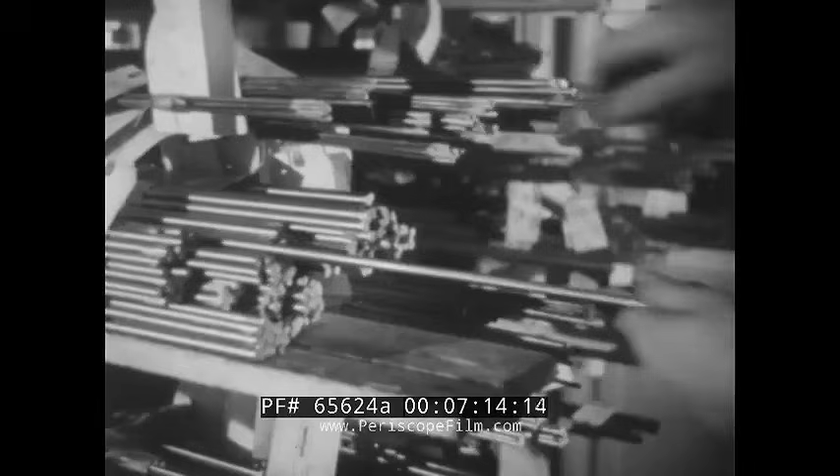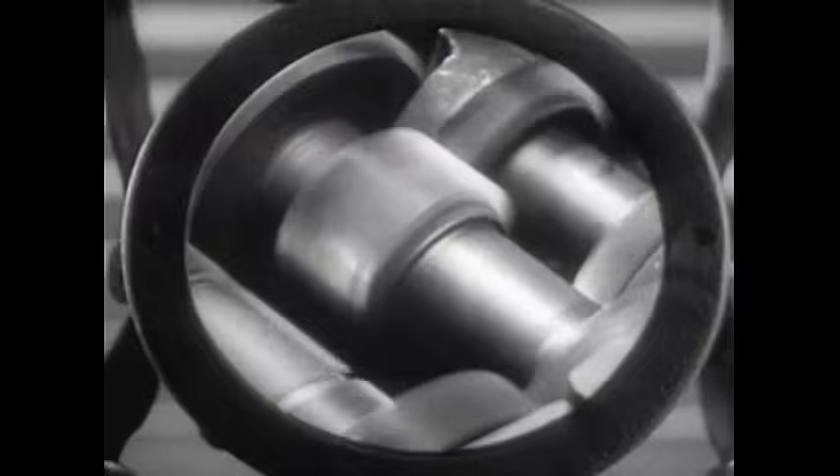They are not being careless, and they are not being slow. They are doing something extraordinarily difficult that almost nobody in the United States knows how to do properly, and they are doing it badly, because the knowledge of how to do it well is 4,000 miles away in a small city in Bavaria, and its owners are not sharing.

32 years later, in the same city, in a factory covering 600,000 square feet in the middle of downtown New Britain, 7,000 people are producing ball bearings at a rate of 100 every minute. 100 a minute is 6,000 an hour, is 144,000 in a day of continuous running. Set that against the 7 men and their 150, and you are looking at roughly a 1,000-fold increase in a single lifetime, in the same town, under the same company name.

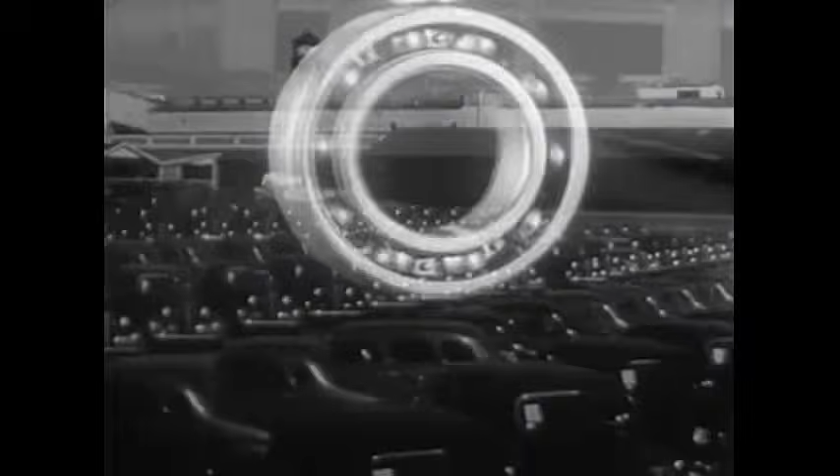That company was the Fafnir Bearing Company, and it was founded on a proposition that in 1911 sounded close to absurd, that an American factory could make a ball bearing as good as a German one, because in 1911 it could not. America built more automobiles than anyone on earth, and could not make the bearings that went inside them.

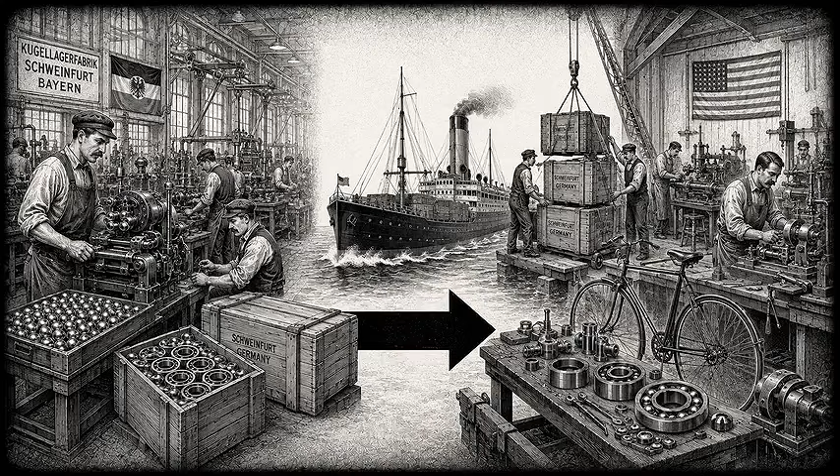The bearings, or the components to assemble them, came in on ships from England and above all from Germany, where they were expensive and hard to obtain and unquestionably the best in the world. This is the story of the object that America could not make, of why it was so much harder than it looks, and of how a hardware town in Connecticut learned the trick.

To understand the dependency, you have to understand how completely the ball bearing had become the connective tissue of industrial civilization by the early 20th century. Anything that rotates has a bearing at each end. The bicycle boom of the 1890s ran on ball bearings.

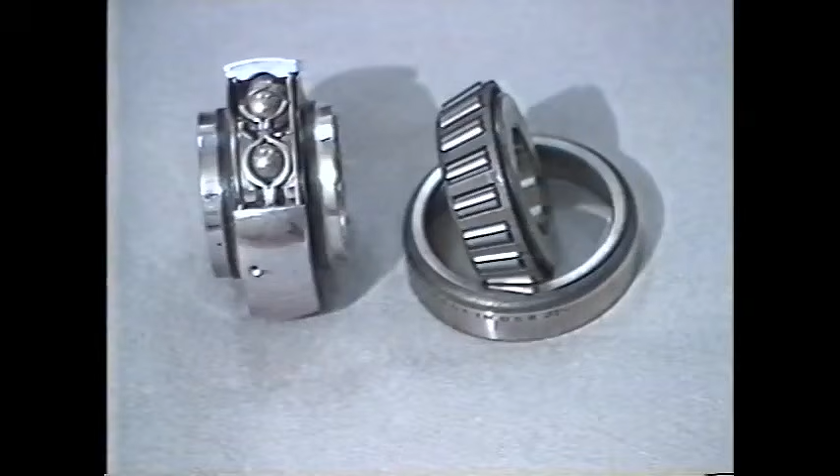The automobile, arriving in earnest in the first decade of the new century, consumed them by the dozen per vehicle. Electric motors, machine tool spindles, generators, pumps, fans, transmissions, every rotating shaft in every machine in the world sat in bearings, and the best of those bearings were rolling element bearings, and the best rolling element bearings came out of Germany. The American position was genuinely uncomfortable.

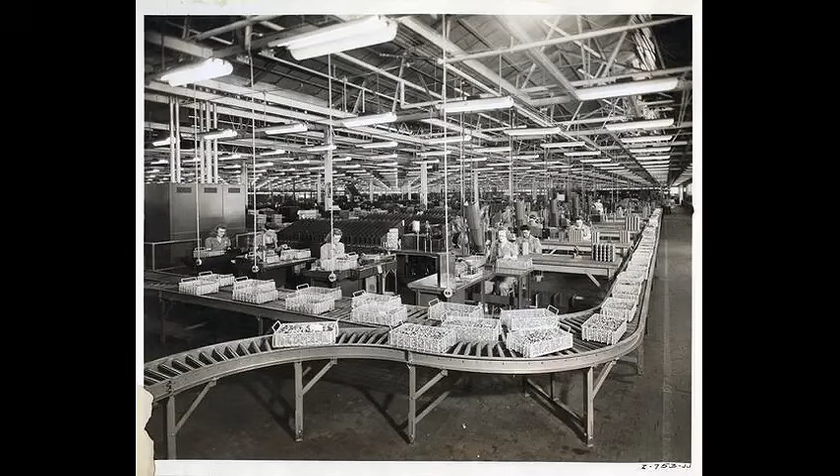This was not a nation short of engineering talent or manufacturing capacity. This was the country that had invented interchangeable manufacture, that was in the process of inventing the moving assembly line, that would shortly be producing automobiles at a rate the rest of the world could not comprehend.

And it was importing the little steel spheres that made those automobiles' wheels turn, or importing the components and assembling them domestically, because the process knowledge required to make a precision ball bearing to German standard did not exist in the United States and could not be bought.

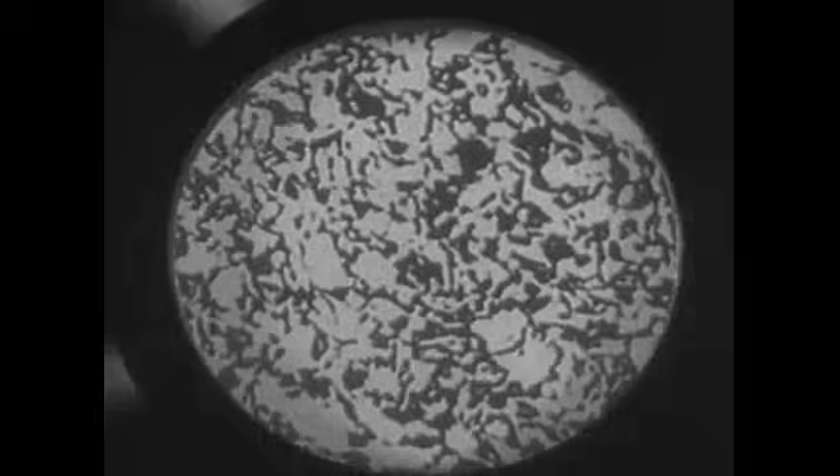That last point is the crucial one. Patents can be licensed, machines can be purchased. But what Germany possessed was not principally a patent or a machine, it was 3 decades of accumulated, hard-won, hands-on process knowledge about a manufacturing problem that is far, far harder than it appears from the outside.

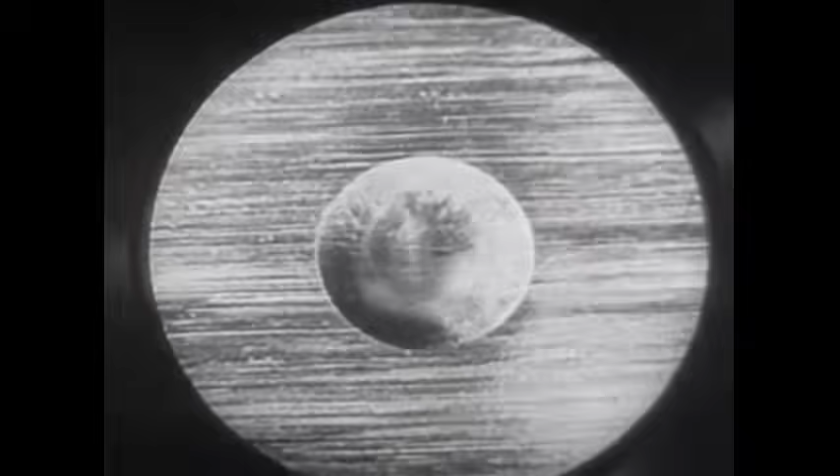Complexity of design and difficulty of production are 2 entirely different axes, and they frequently point in opposite directions. A complicated machine is hard to design and, once designed, often straightforward to make, because it is assembled from many parts, each of which is individually undemanding.

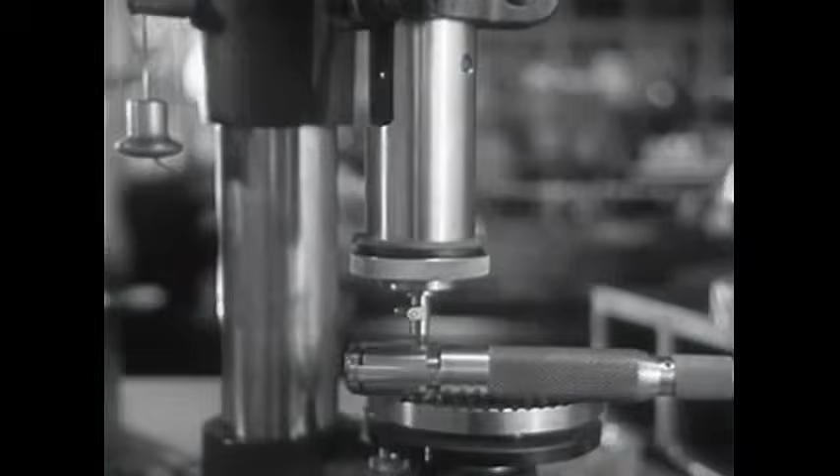A ball bearing is trivial to design and savagely hard to make, because its entire function depends on a handful of dimensions being correct to a degree of precision that ordinary manufacturing simply cannot reach, and because one of those requirements is the production, in millions, of an object that is genuinely, mathematically perfect. The resolution of the paradox is that Germany's advantage was never intellectual, it was procedural.

Germany had figured out how to make a perfect sphere, cheaply, by the million, and America had not. No amount of American cleverness about engines or assembly lines substituted for that one specific piece of shop floor know-how.

To see why it was so hard, you have to look at what a ball bearing actually does, and then at what that demands of the balls inside it.

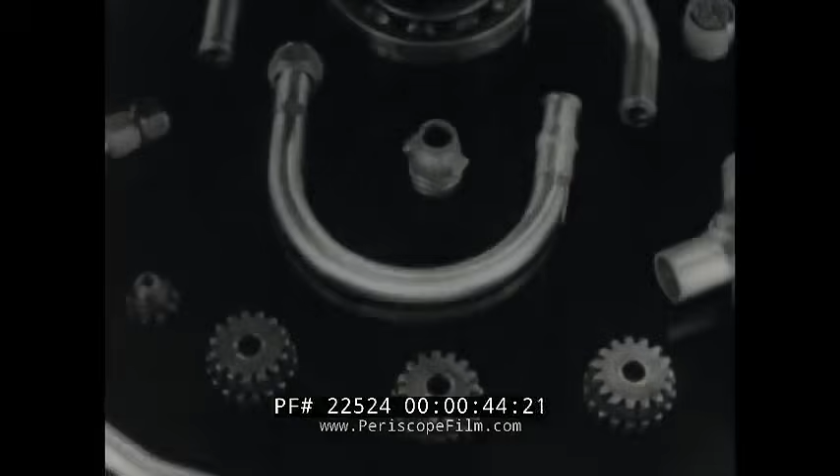The popular history of American industrial power tends to start with the assembly line and run forward, as though American manufacturing supremacy were a natural condition that simply switched on around 1913. It skips the long, unglamorous apprenticeship, the decades in which American industry was in some areas a follower, buying its precision from Europe and, slowly, expensively, learning to make it at home.

It also, when it does mention ball bearings, almost always jumps straight to the Second World War and the bombing of Schweinfurt, the famous and famously costly attempt to strangle German war production by destroying its bearing plants. That story is worth telling, and this channel has told it.

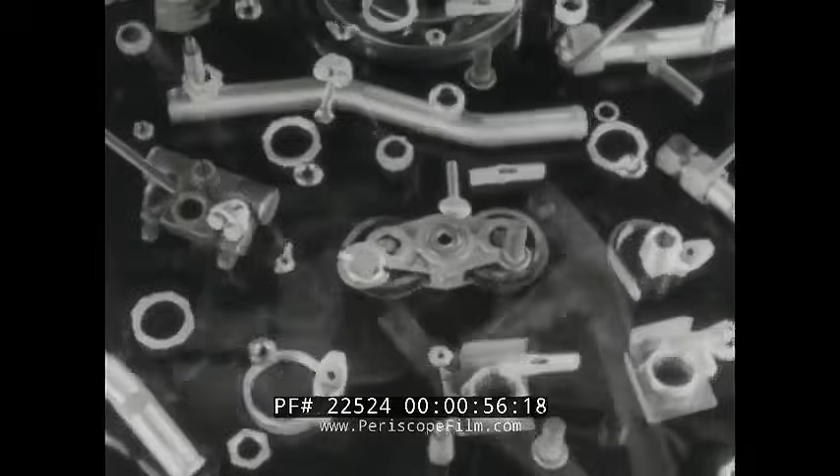But it is the last chapter, and telling only the last chapter makes it look as though bearings mattered because bombers attacked them. They mattered long before, and the reason Schweinfurt was a target at all in 1943 traces back to a decision a Bavarian metalworker made in the 1880s that gave one small city a grip on a global industry.

And the popular history entirely omits the mechanical heart of the matter, which is the genuinely beautiful question of how you make a perfect sphere. Not a nearly round lump, a sphere, round to within a fraction of a thousandth of an inch, identical to its neighbors, produced not one at a time by a craftsman, but in industrial millions. That is the actual problem.

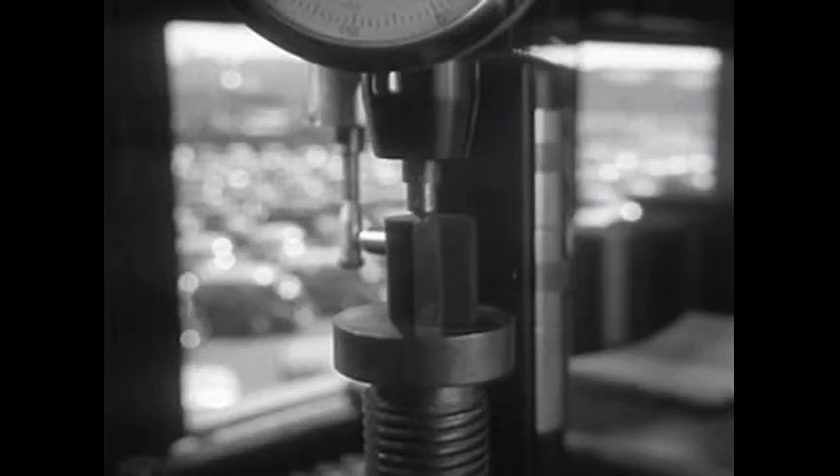Everything else in the story of the ball bearing, the German dominance, the American dependency, the Connecticut factory that broke it, is downstream of that single manufacturing question. So let us answer it properly, starting with why sphericity matters so much in the first place.

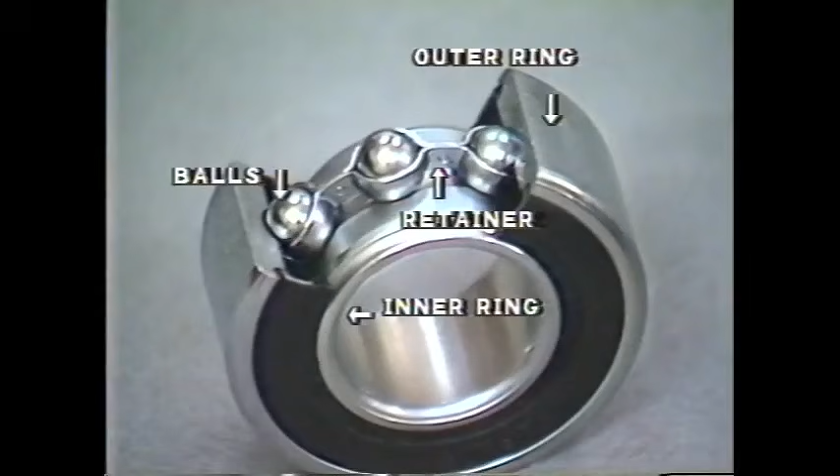Put a shaft in a plain hole and turn it, and the two surfaces slide against one another. Sliding friction is high, it generates heat, and without a well-designed film of lubricant between them, the surfaces will gall and seize. The ball bearing eliminates the sliding entirely by inserting rolling elements between the shaft and its housing, and rolling friction is a small fraction of sliding friction.

That is the entire proposition. Replace sliding with rolling, and the shaft spins nearly free.

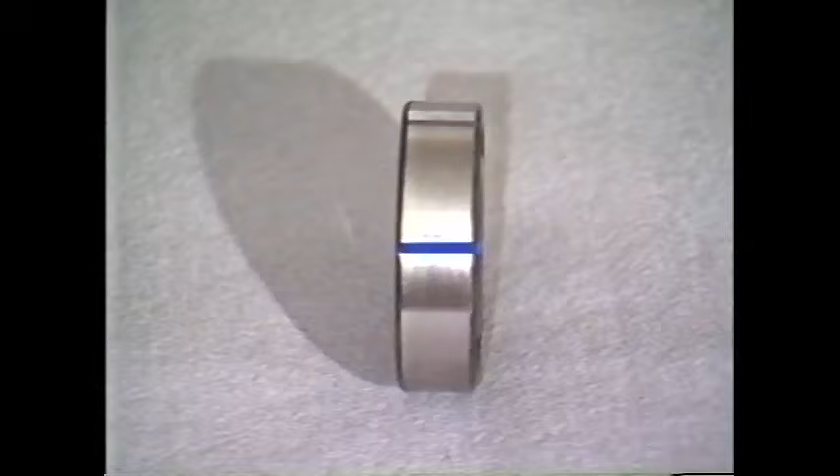But look closely at how the load actually travels through the bearing, because this is where the precision requirement comes from. The shaft's weight and working load pass into the inner ring, then into the balls, then into the outer ring, then into the housing.

And the contact between a ball and a raceway is, in the pure geometric sense, a single point. Under load, the steel deforms elastically, and that point spreads into a tiny ellipse, but it remains extraordinarily small, and the entire load passes through it.

The pressures at that contact are enormous, far beyond what the steel could bear over any larger area, sustained only because the contact is momentary and rolling, and the steel is exceptionally hard.

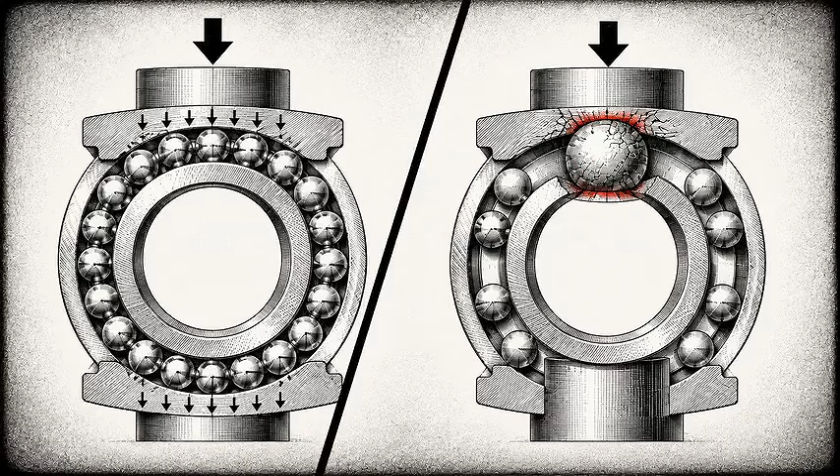Now consider what happens if the balls are not all the same size. Suppose one ball in a set is 1/10,000th of an inch larger than the others. That ball, being fractionally taller, does not share the load. It carries it, all of it, or nearly.

Every other ball is riding free, and the one oversized ball is taking the whole load through its single tiny contact patch at a pressure it was never designed to survive. It will fatigue, spall, and disintegrate, and its fragments will destroy everything else in the bearing.

That is why the ball bearing is a precision object rather than a simple one. It does not merely need round balls, it needs balls that are round and identical to tolerances that a 19th century workshop could not measure, let alone produce.

Stop and consider the sphere as a manufacturing problem because it is unlike anything else in a machine shop. Almost every other shape is made by controlling a tool's position relative to the work. You turn a cylinder by holding a cutter at a fixed distance from a rotating axis. You mill a flat by running a cutter along a straight path. You drill a hole by guiding a drill along a line. In every case, accuracy comes from accurately positioning the tool.

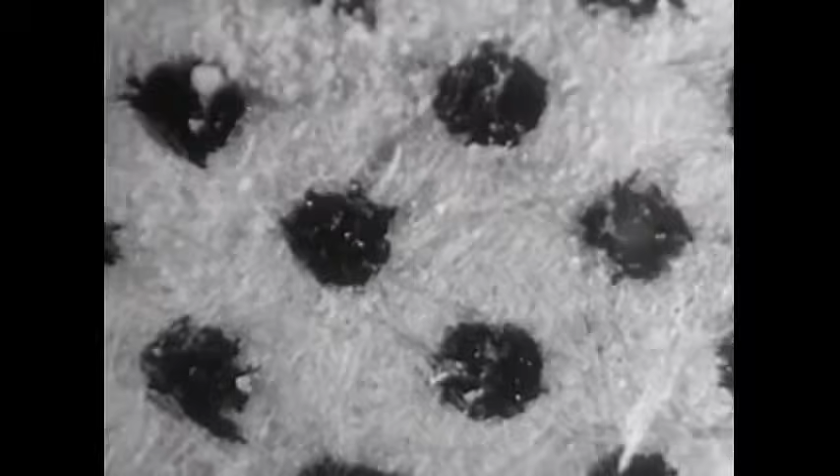A sphere defeats this. A sphere has no axis, no flat, no edge, no feature to reference from. Every point on its surface is identical to every other. There is no orientation in which you can clamp it that distinguishes one part from another, and if you were to hold it and machine one region, you would need to release it, reorient it perfectly, and machine the next region, blending seamlessly, and you would have to do this over the entire surface without ever creating a facet, a step, or a flat spot.

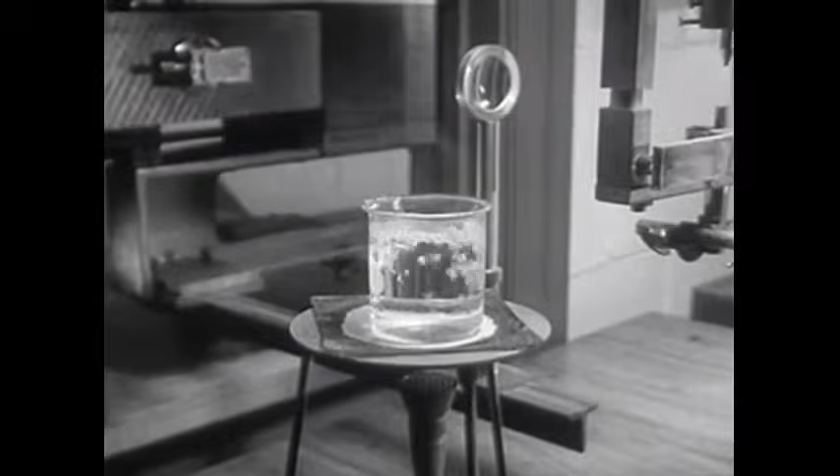Doing that once by hand with enormous skill is possible. Doing it a million times identically is not. Before Germany solved it, this is exactly how balls were made. They were produced by hand on turning machines, largely in England, and the results were what you would expect: imprecise, prone to breakage in service, and expensive. Every bearing was limited by its worst ball, and there were always worst balls.

The bicycle makers and early machine builders lived with it because there was no alternative. The breakthrough, when it came, did not consist of finding a cleverer way to aim a tool at a sphere. It consisted of abandoning the idea of aiming altogether, and it came out of a bicycle workshop in Bavaria.

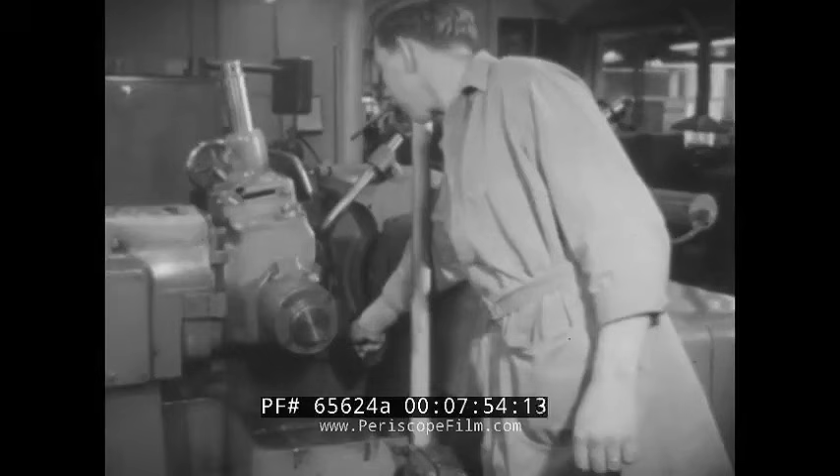Friedrich Fischer was a metal worker and turner in the small Bavarian city of Schweinfurt, and in the early 1880s he was building bicycles. Bicycles need bearings, bearings need balls, and the hand-turned English balls available to him were expensive and unreliable. So he began experimenting with machines of his own design to make them. And after a long, costly, laborious series of trials, in 1883, he succeeded.

His machine has come down to us as the ball-grinding mill, and what it achieved was the mass production of hardened steel balls that were of equal size and genuinely round to a precision on the order of 0.02 of a millimeter, which in the context of 1883 was astonishing. Not one ball, large volumes of balls, all alike.

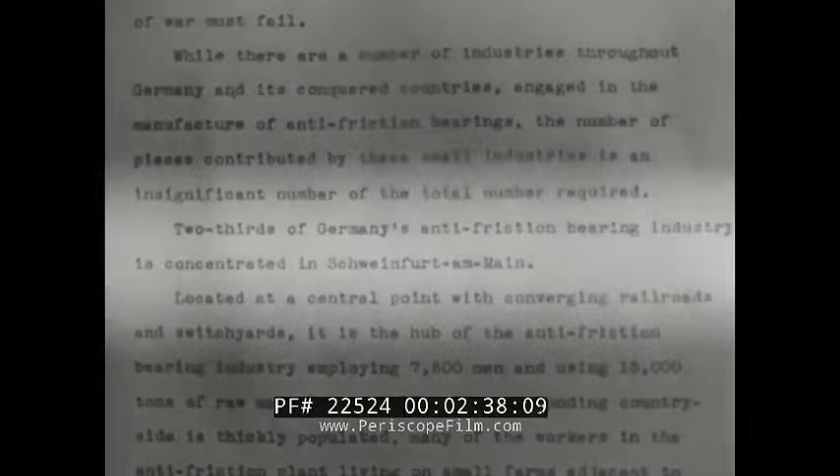Fischer had turned the sphere from a craftsman's triumph into an industrial commodity, and in doing so, he founded an industry. The consequences compounded with remarkable speed.

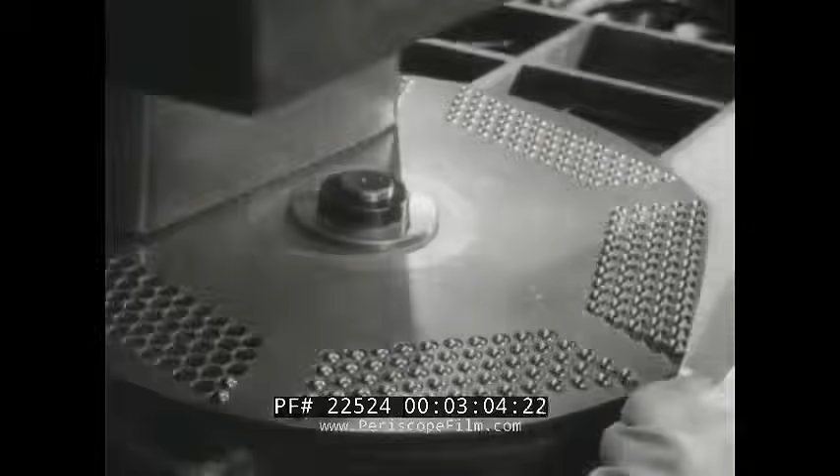Fischer's own operations and those that grew around him made Schweinfurt the world capital of the rolling bearing. His son founded the Kugel-Fischer firm in 1906, which became the cornerstone of the German industry, and other firms clustered in the same city, drawn by the pool of skilled men and accumulated technique. By the mid-20th century, 5 plants in Schweinfurt were producing something close to 2/3 of all Germany's ball and roller bearings, and the population of the town had tripled to 50,000 on the strength of it.

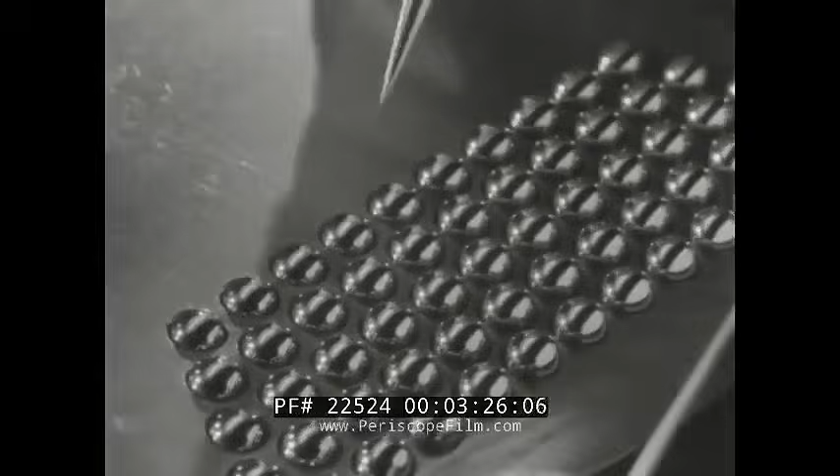A single mechanic's invention in a bicycle shop had created a concentration of industrial capability so significant that 60 years later, air forces would fly across a continent and lose hundreds of aircraft trying to destroy it. And in 1911 in Connecticut, 7 men were trying to work out how he had done it.

New Britain, Connecticut called itself the hardware capital, and it had earned the name. It was a town of metal-working firms, of tool and die, of factories that made locks and fittings and stampings and the countless small metal objects of American domestic life. It had exactly the kind of dense local concentration of metalworking skill that any hard manufacturing problem requires, and it had one man looking for a problem worth solving.

Howard Stanley Hart was president of the Hart and Cooley Company and had just come off overseeing production of the Corbin motor car. He was not an immigrant genius or a lone inventor. He was a New England manufacturer of the practical, well-connected sort. And what he possessed was an eye for a market gap and the nerve to walk into it.

He looked at the American bearing situation, at a growing automobile industry buying its bearings from Germany and England at high prices and uncertain supply, and he asked the direct commercial question: could German-quality ball bearings be produced in America? Nobody in America knew the answer because nobody had seriously tried at that quality level. So Hart did what a manufacturer does. He set up an experimental department inside Hart and Cooley and began finding out.

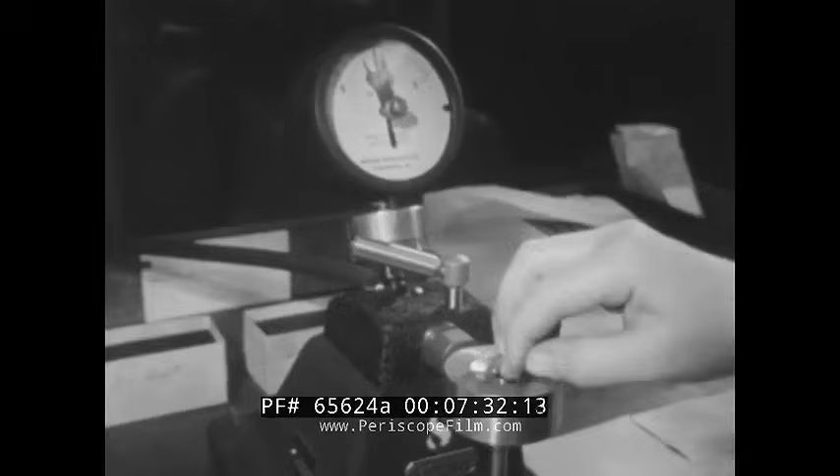The process that Fischer pioneered and that Fafnir had to reconstruct is, in its essentials, still the process used today, and it is one of the most satisfying manufacturing sequences in all of engineering, because each stage solves a specific problem created by the last.

It begins with wire. Steel is drawn down to a wire of carefully controlled diameter, and this is where the first hidden requirement appears: the steel itself must be exceptionally clean. Rolling bearing steel is a through-hardening high-carbon chromium alloy, and the enemy is inclusions, microscopic non-metallic particles trapped in the metal during steelmaking. Under the punishing repeated contact stresses inside a working bearing, an inclusion just below the surface becomes the nucleus of a crack, and the crack becomes a spall, and the spall destroys the bearing.

Bearing steel is therefore among the most demanding steel specifications in ordinary industry, and metallurgy that would be perfectly acceptable for a structural bolt is disqualifying here.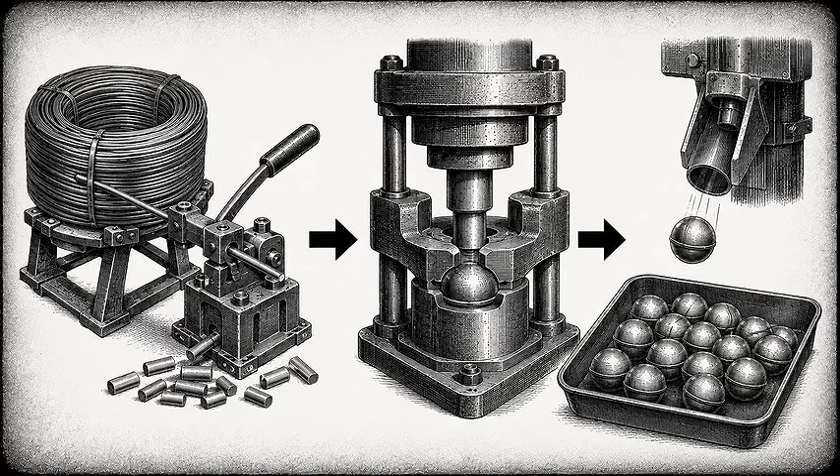The wire feeds into a cold heading machine, which shears off a cylindrical slug of precisely the right volume, and in a single blow between two hemispherical die halves forges it cold into a rough ball. This is done at room temperature and at high speed, on the order of a ball a second for larger sizes, and several a second for smaller ones, and it is a violent and extremely loud operation.

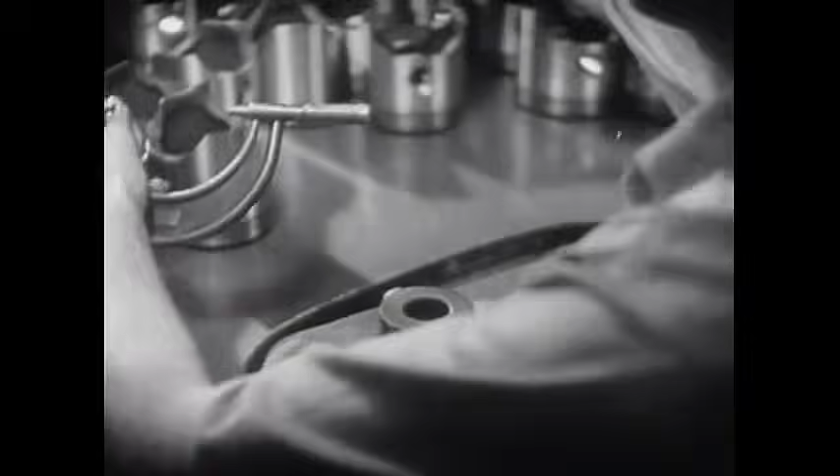Because the die must fill completely, a slight excess of material is used, and that excess squeezes out at the parting line, leaving each rough ball wearing a ring of flash around its equator, like the seam on a poorly made toy. At this stage the ball is soft, approximately spherical, and wrong in every dimension that matters. Everything after this is the removal of error.

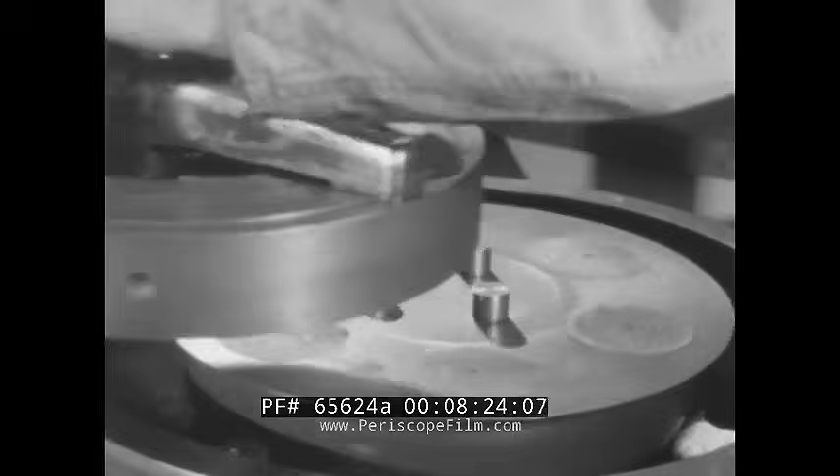The flash must come off, and the way it comes off contains the entire secret of sphere making, so it is worth watching closely. The rough balls are fed between two heavy plates, cast iron, faced with circular grooves. One plate is stationary and one rotates.

The balls are held in the grooves under pressure and rolled around and around, and as they roll, the flash is worn away. Then the balls are collected at the outlet, returned to the inlet by a conveyor, and sent through again, and again, and again, circulating through the machine repeatedly until the desired condition is reached.

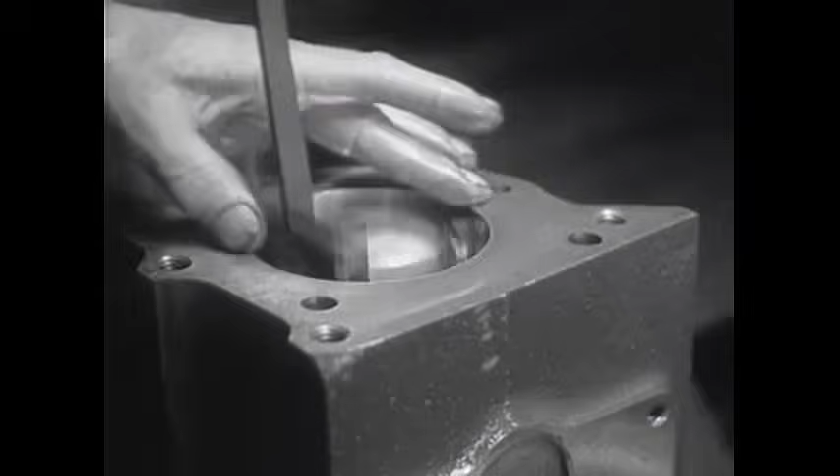Here is the crucial thing, and it is genuinely beautiful. Because a ball rolling in a groove is completely free to rotate about any axis, and because it is knocked into a new orientation every time it is discharged and recirculated, no part of any ball's surface is favored. Over thousands of passes, every region of every ball spends, statistically, exactly as much time in contact with the abrasive as every other region. The high spots projecting further are pressed harder and worn faster.

The low spots are touched less. The process is therefore self-correcting, and it converges inexorably on the only shape that has no high spots and no low spots at all. That shape is the sphere.

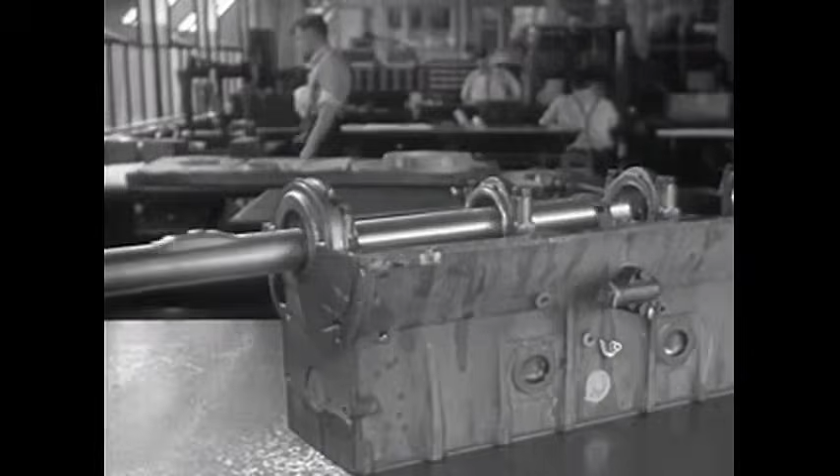This is why you cannot make a ball by aiming at it. You make a ball by setting up a process that is blind to orientation and letting it run, and sphericity emerges as the mathematical attractor of the operation.

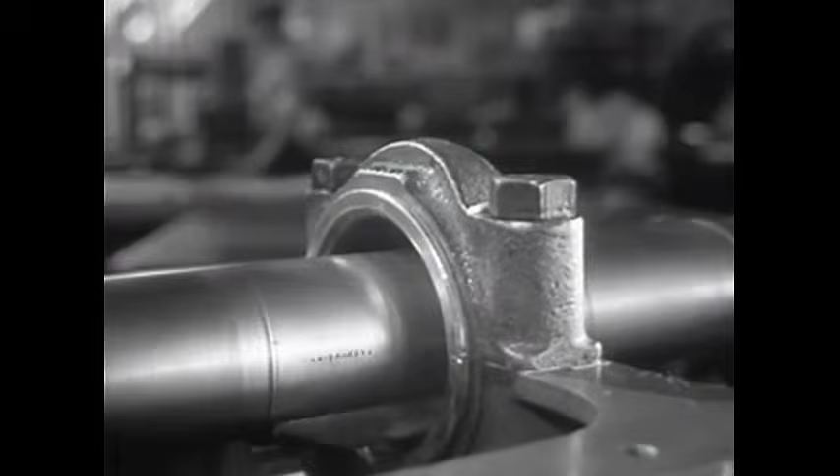It is a generative process rather than a positional one, and once you grasp it, the whole thing snaps into focus. Fischer's genius in 1883 was not a clever cutting geometry, but the realization that a randomizing, recirculating, orientation-blind process would produce perfect spheres in bulk from imperfect ones without any operator ever deciding where to cut.

With the flash gone and the balls approximately round, they go to heat treatment, and the placement of this step in the sequence is itself a piece of hard-won process wisdom.

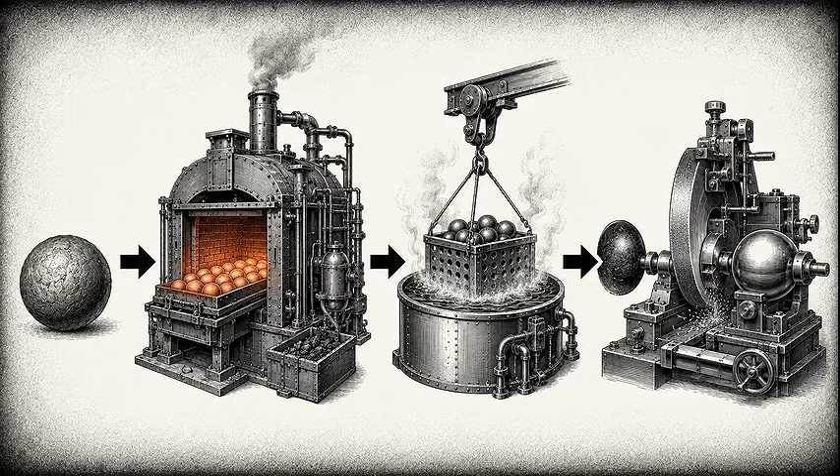The balls are heated to austenitising temperature, then quenched rapidly, usually in oil, transforming the steel structure into martensite, which is extremely hard and extremely brittle. They are then tempered, reheated to a lower temperature, which sacrifices a little hardness to buy back toughness and relieve the internal stresses left by the quench.

The result is a ball hard enough to survive those punishing point contacts without permanently deforming, and tough enough not to shatter under shock. But hardening warps things. The volume change as the steel transforms, combined with the fierce thermal gradients of the quench, means that every ball comes out of heat treatment slightly distorted and slightly the wrong size. The sphericity so carefully generated before hardening has been partially spoiled by the hardening itself, which is exactly why the work is not finished before heat treatment.

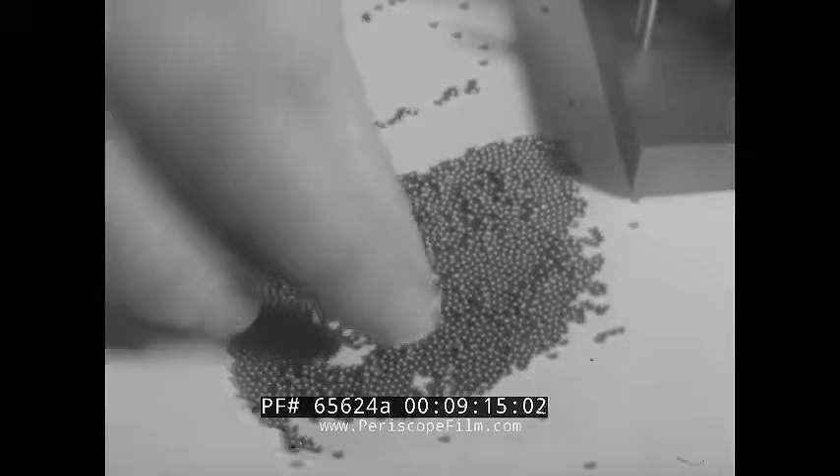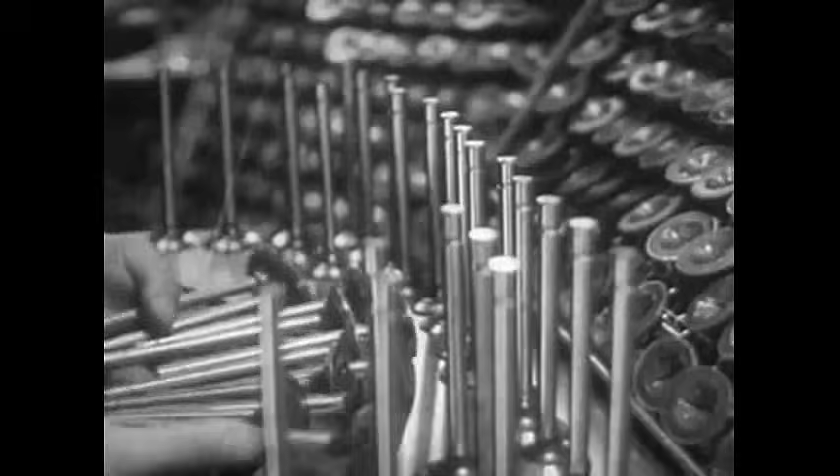The sequence is deliberate. Rough the balls while the steel is soft and easy to cut, because removing large amounts of material from hardened steel is slow and expensive. Then harden. Then grind again, now on hardened steel, to restore and improve the geometry that hardening disturbed. Grinding after heat treatment uses the same principle as before, the balls rolling in grooves between a plate and an abrasive wheel, circulating repeatedly, the same orientation blind convergence, but now working on steel hard enough to hold the shape it is given. Do it in the wrong order, and you either wear out your tooling on hardened steel, or you deliver perfectly round balls that warp in the furnace.

Knowing the order is not obvious. It is precisely the sort of thing that is learned by failing, and it is precisely the sort of thing that does not cross an ocean in a book.

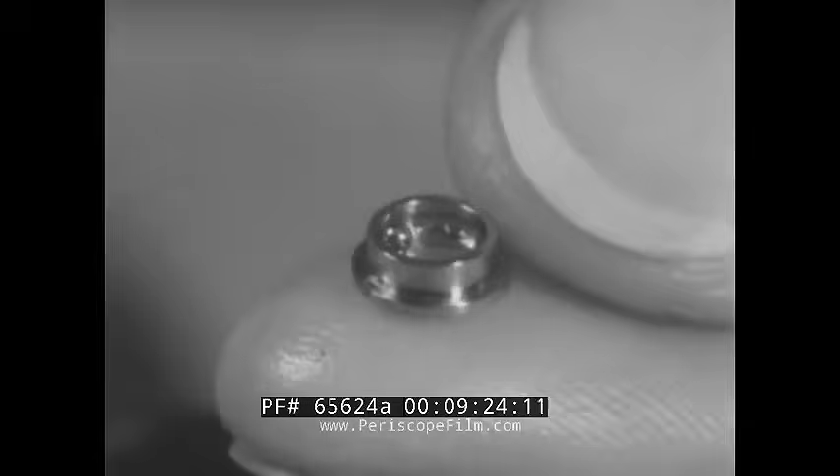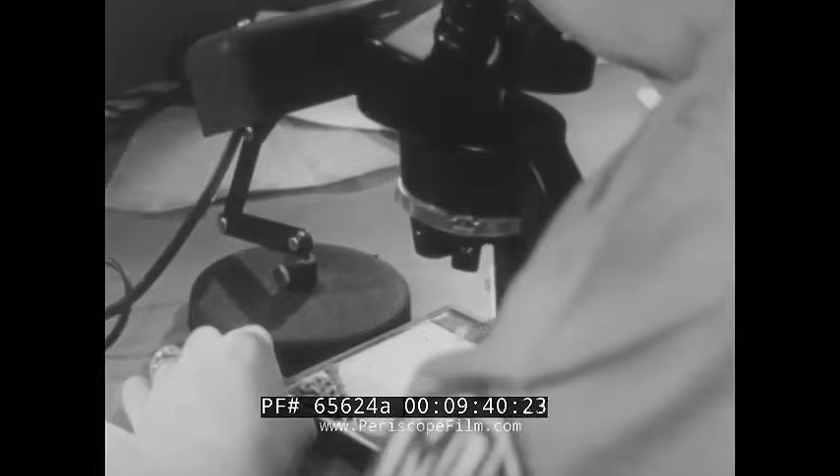The final operation is lapping, and it is the same idea again, taken to its extreme. The balls are rolled once more between plates, one fixed, one rotating slowly, but now the abrasive is exceptionally fine, a slurry of very fine grit or diamond dust, and the material removal rate is minute. Lapping is not shaping. It is the last correction, taking the balls from very good to as good as measurement can confirm. The surfaces come out with a mirror finish, and the geometry converges to diameter variations well below a micron and sphericity to match.

Then the balls are washed to remove every trace of abrasive and fluid, because a single embedded grain of lapping compound left on a bearing ball is a guarantee of eventual failure. They are inspected for scratches and defects, and then they are sorted and graded, because even after all of this, small variations remain. And the whole point is that the balls in one bearing must match each other. The grading system that grew up around this expresses precision as a grade number, lower being tighter, and it encompasses diameter tolerance, sphericity, and surface finish together.

Note what the sorting implies. Even the best process does not produce identical balls. It produces a population with a distribution, and the final act of precision is measurement and selection, putting matched balls together and sending the rest to less demanding grades. Precision at this level is not only a matter of making well, it is a matter of measuring well, and then choosing.

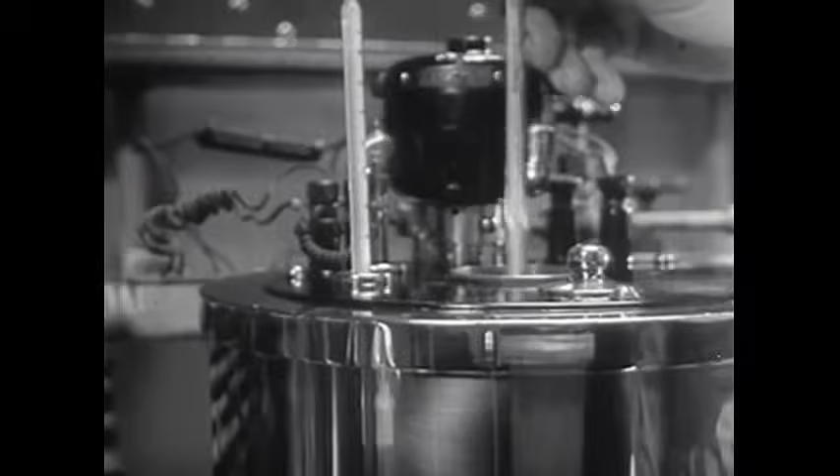Seven men producing 150 bearings a day were fighting every one of these stages simultaneously, with none of the accumulated shortcuts, and every one of those stages had to be solved before the eighth man could be hired.

The balls are only half the problem. The rings they roll in are the other half, and they contain a subtlety that repays attention. Instinct says that the groove in the raceway should match the ball exactly, cradling it. Instinct is wrong, and dangerously so.

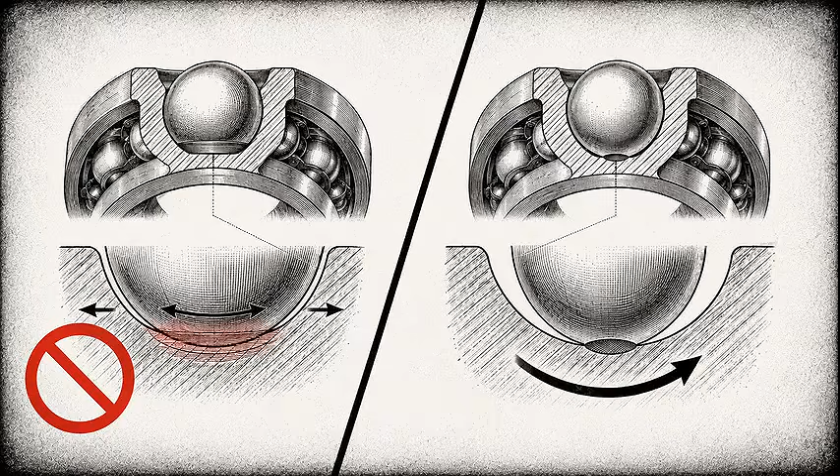If the groove radius equaled the ball radius, the ball would contact the raceway along a broad curved band, rather than at a point. And because different parts of that band would sit at different distances from the bearing's axis, they would need to travel at different speeds. They cannot, it is one rigid ball. So most of the contact band would have to slide rather than roll, which reintroduces exactly the sliding friction the bearing exists to eliminate, generating heat and wear, and destroying the bearing's whole purpose.

So the groove is deliberately made a little larger in radius than the ball, conventionally a modest percentage larger, which shrinks the contact back down to something very close to a point. That restores true rolling. But it also concentrates the load into a tiny ellipse, which drives the contact pressure up and demands the hardness and the metallurgical cleanliness discussed earlier. The groove radius is therefore a compromise between friction and stress, and where a manufacturer sets it is a matter of judgment, backed by testing, another piece of proprietary process knowledge.

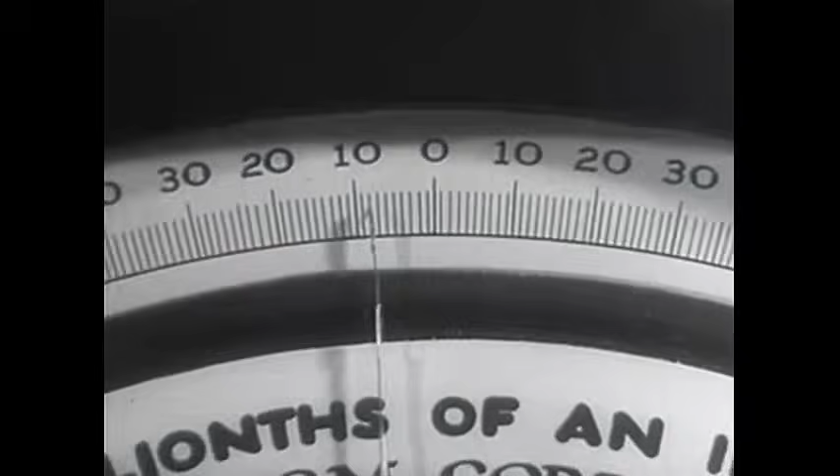And the raceways themselves must be ground, hardened, and finished to the same order of precision as the balls, on the inside of a ring, which is a substantially more awkward machining problem than the outside of one. Bearing quality is the product of ball quality and raceway quality together, and a company that had mastered only one of them had mastered nothing.

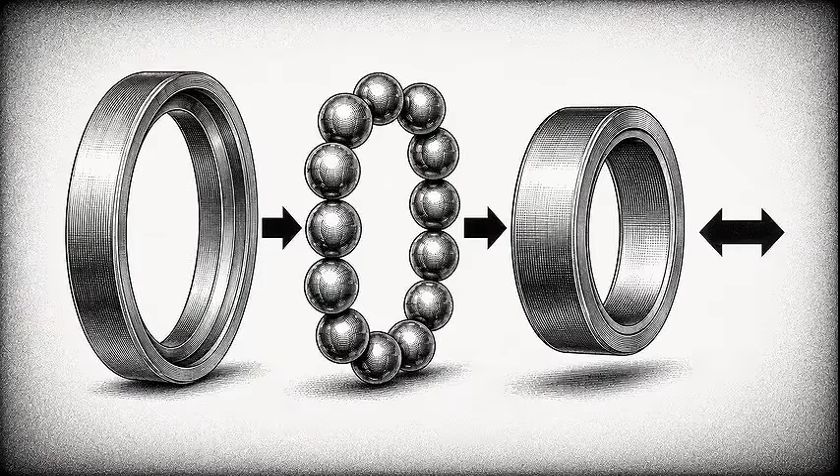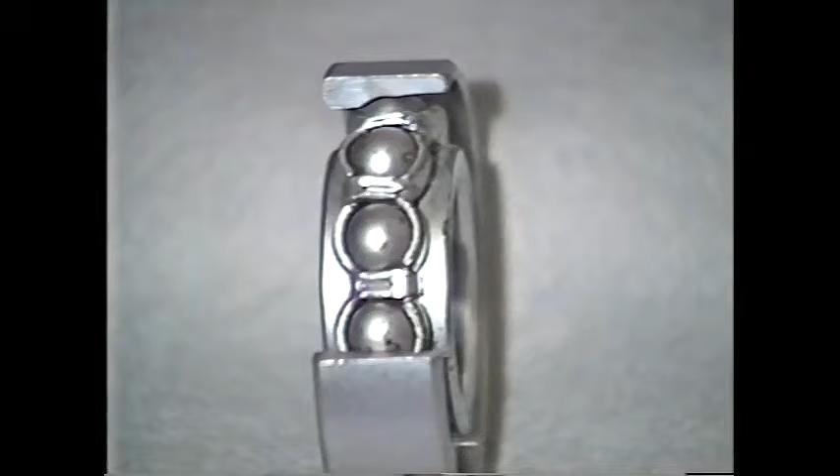There is one more problem, and it is the kind that delights anyone who likes a puzzle. Consider the deep groove ball bearing, the most common type ever made, in which the balls sit in grooves cut into both the inner and outer rings, so that the bearing can carry load along the shaft as well as across it. The grooves are deep, which is what makes the bearing strong. Now assemble it. The inner ring must go inside the outer ring, with balls between them, and the balls must be larger than the radial gap, because if they were not, they would fall out and carry nothing.

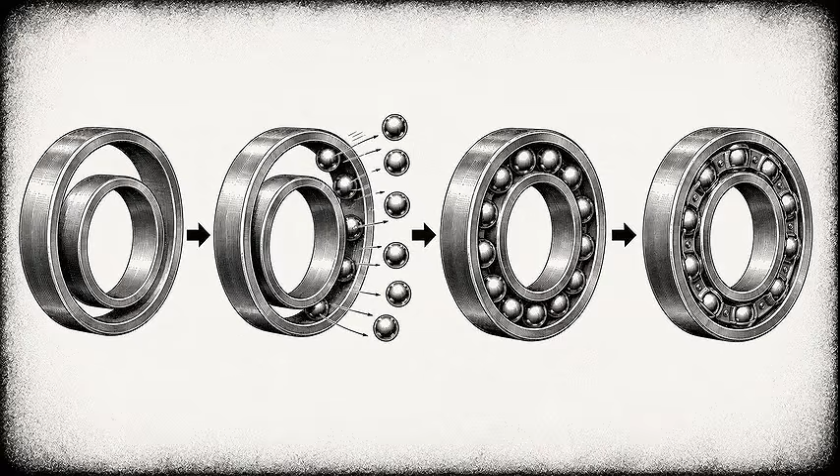So how do the balls get in? The answer, patented at the beginning of the 20th century and known ever since as the Conrad method after the engineer credited with it, is elegant enough to be worth picturing. You place the inner ring inside the outer ring, but push it hard to one side, so the two rings are eccentric, touching on one side and leaving a crescent-shaped gap on the other.

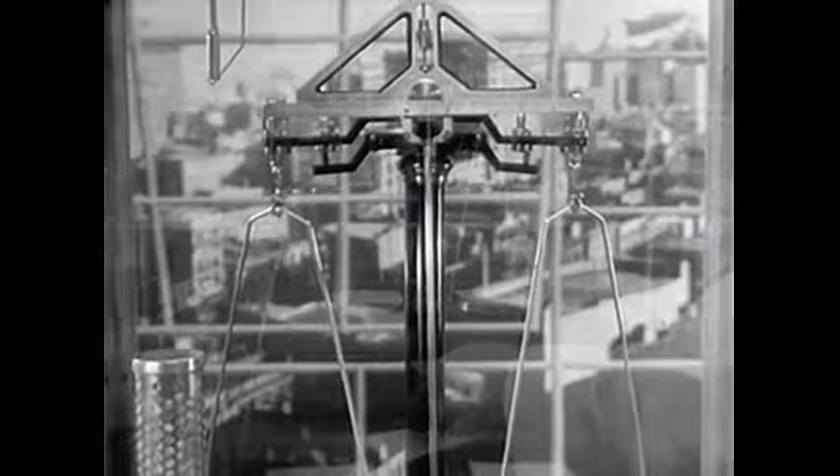Into that crescent you drop the balls, one after another, as many as will fit, which is fewer than the bearing will finally hold in the sense of filling the circumference. Then you push the inner ring back to the center, which traps the balls, and finally you distribute the balls evenly around the circumference and install a cage to hold them at their spacing. No slots, no split rings, no assembly features to weaken the raceways, just a sequence of moves, exploiting the clearance that exists only during assembly.

It is the sort of solution that seems obvious once seen and is invisible before, and it is another example of why the ball bearing is not the simple object it appears. Even putting it together required an invention.

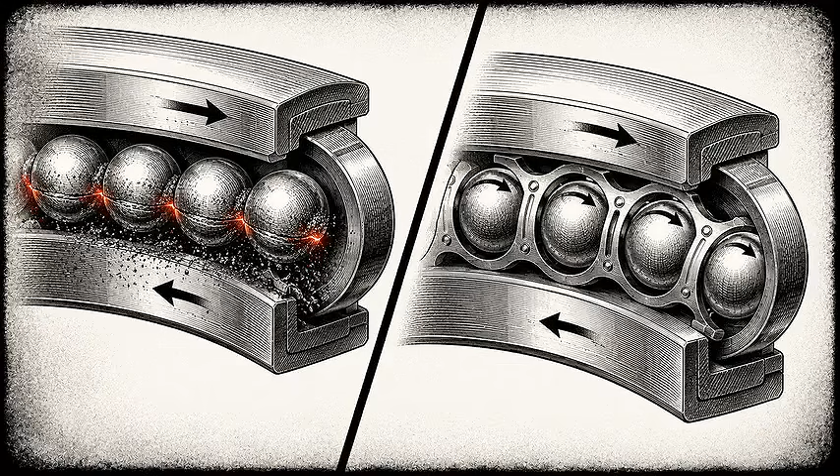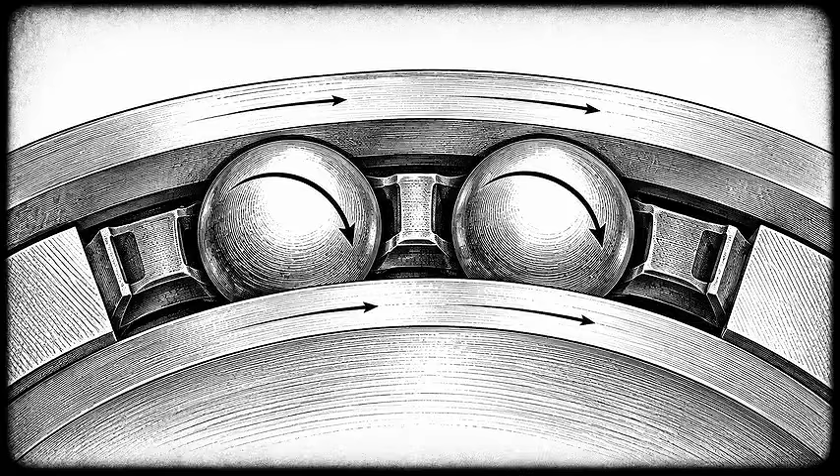The cage, or separator, looks like the least important part of a bearing and is in fact essential, for a reason that is easy to miss. Watch two adjacent balls rolling between the raceways. Both are rotating in the same rotational sense as they roll along. But at the point where their surfaces come closest to one another, the surface of one ball is moving in one direction and the surface of the other is moving in the opposite direction.

Because that is what happens when two adjacent rotating bodies touch. Their surfaces meet head-on at twice the surface speed. If the balls were free to bunch up and touch, every such contact would be a high-speed rubbing contact, sliding rather than rolling, generating heat, wearing flats, and defeating the purpose of the whole device.

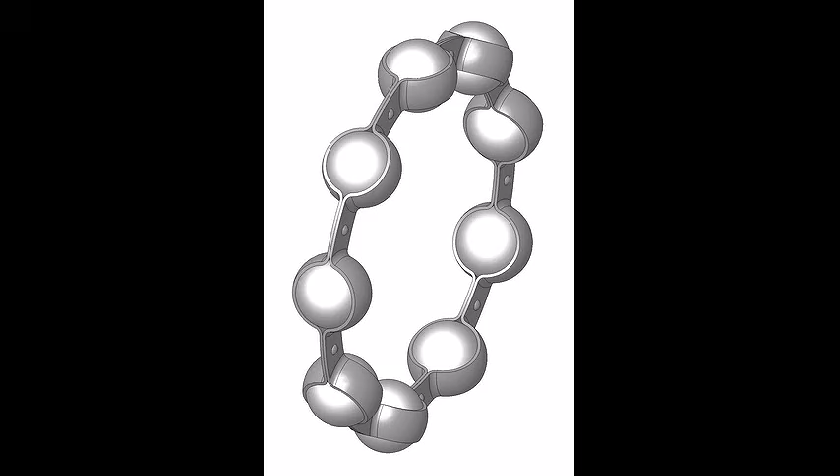So the cage holds each ball in its own pocket, keeps the spacing, and guarantees that the only contacts in the bearing are the rolling contacts with the raceways. It carries almost no load. It simply enforces the geometry.

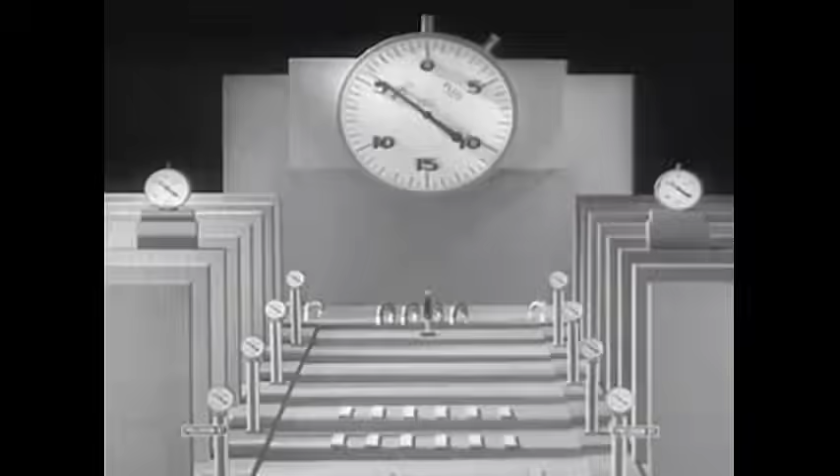This is a recurring theme in the whole subject and worth naming. A ball bearing is not a device that works because its parts are strong. It is a device that works because its geometry is exactly right, and nearly every component in it exists to preserve a geometric condition rather than to carry a force.

The balls must be identical so that load is shared. The groove must be oversized so that contact stays a point. The cage must be present so that balls never rub. Get the geometry right, and a few grams of steel will carry astonishing loads for millions of revolutions. Get it slightly wrong, and the same steel destroys itself in an afternoon.

For its first years, Fafnir's project was reproduction: learn to do, in New Britain, what Schweinfurt already did. That is an unglamorous ambition, and it is the correct one, because you cannot innovate past a competitor whose baseline you have not yet reached.

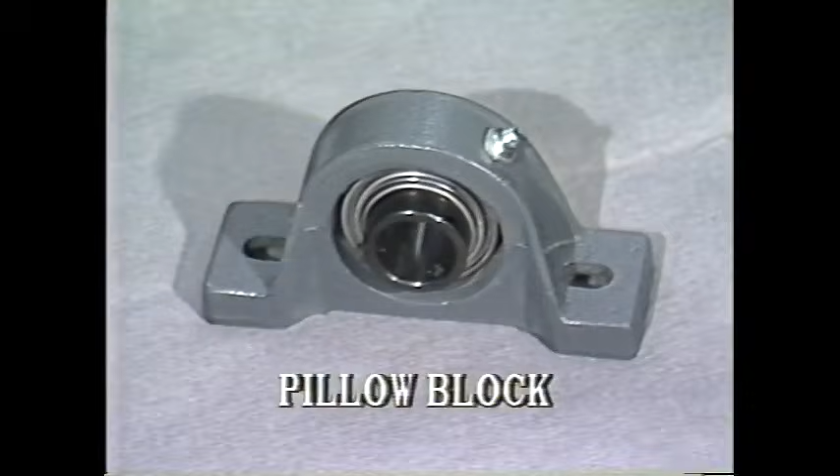But something happens when a company finally reaches the baseline. It stops looking at what the leader does and starts looking at what the customer needs. And the moment Fafnir got there, it began producing inventions of its own.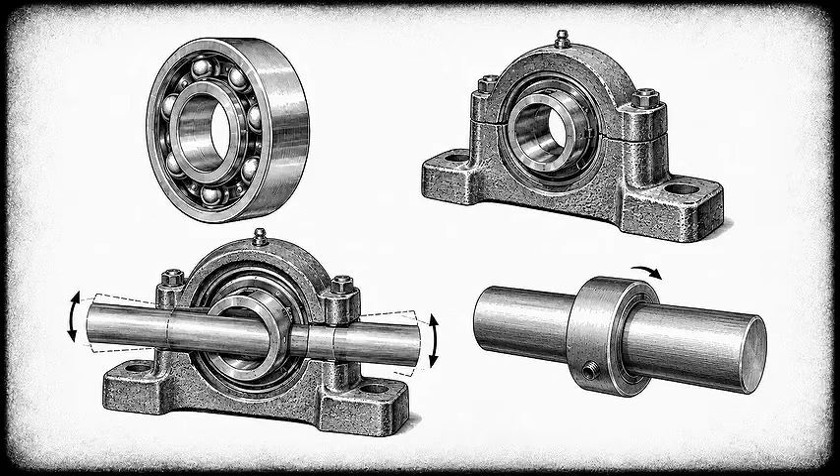Before 1925, the company had introduced the wide inner ring bearing, the pillow block, the self-aligning pillow block, and the self-locking collar, and the pillow block and self-locking collar became industry standards. These are not exotic devices, and that is the point. A pillow block is a housing that holds a bearing so that a shaft can simply be bolted to a frame.

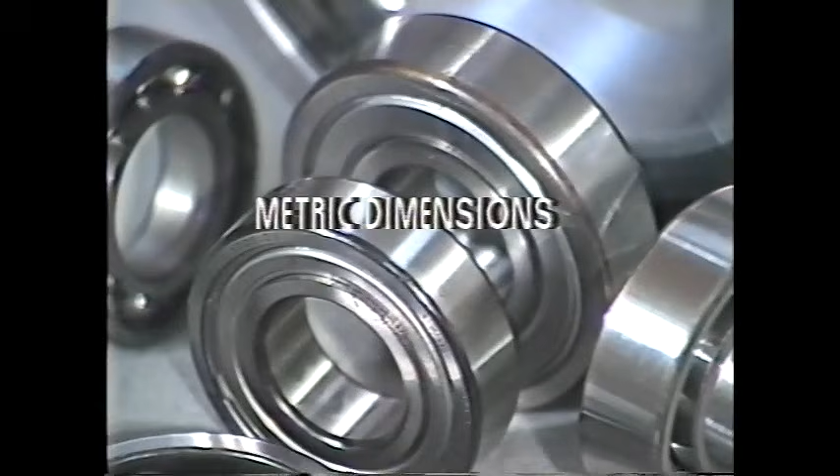A self-aligning pillow block adds the ability to accommodate small misalignments between two supports, which in real machinery is always present and always destructive. A self-locking collar is a means of clamping the bearing's inner ring onto a plain shaft without machining a shoulder or a keyway. Every one of these makes the bearing easier to use for the ordinary engineer building ordinary machinery.

That is a characteristically American axis of innovation. Germany had made the bearing excellent. Fafnir set about making it convenient, and convenience, applied across a whole economy of machine builders, sells enormous numbers of bearings. Within a generation, the follower had found ground of its own to lead on.

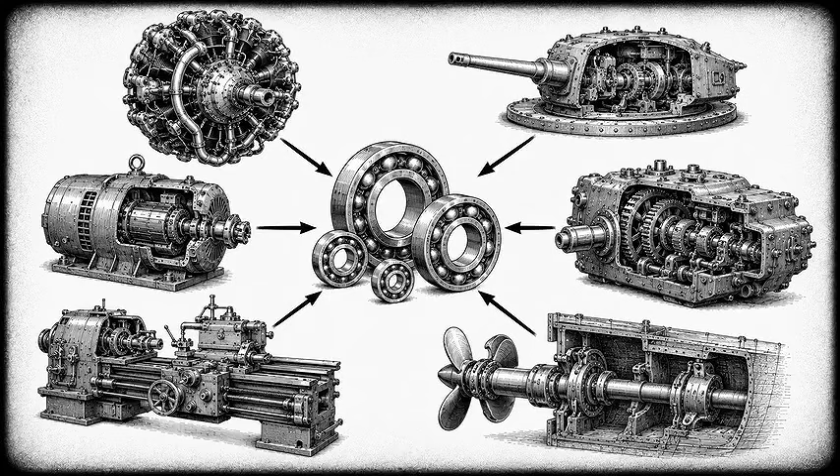Then came the war, and the industry that had been built out of commercial ambition became strategic infrastructure overnight. Every aircraft engine, every supercharger, every gun turret traverse, every tank transmission, every electric motor in every ship, every machine tool in every factory building, any of those things, all of it turned on bearings.

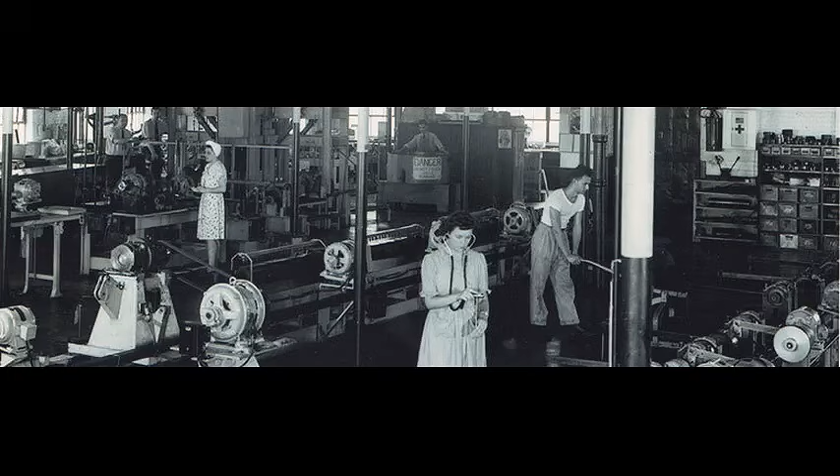Demand went vertical, and Fafnir, which had spent three decades climbing from 150 bearings a day to a serious industrial operation, expanded into something that would have been unrecognizable to the seven men in the experimental department: 7,000 workers in a 600,000 square foot plant in the center of New Britain, turning out 100 ball bearings every minute. The workforce that achieved that number is worth pausing on, because it was not the workforce of 1911.

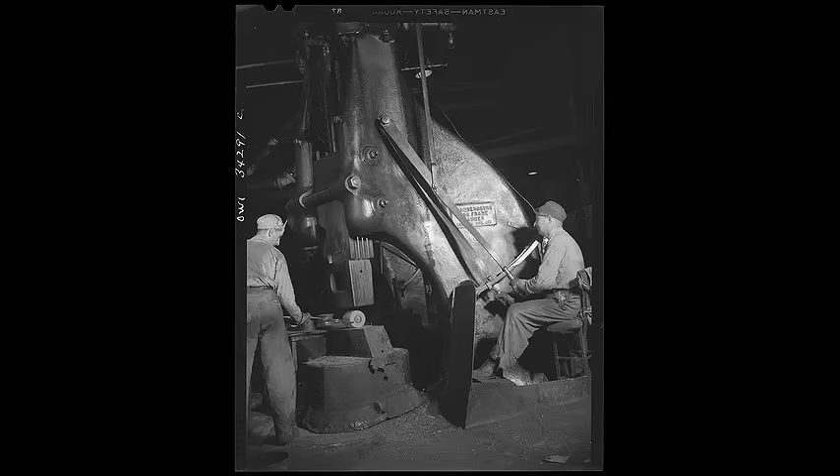In June of 1943, the photographer Gordon Parks came to the plant on assignment and photographed the people making these bearings, and the record he left is a portrait of exactly what American war manufacturing actually looked like. Among his subjects was Joseph Koilnik, described as a Russian Jewish immigrant working as a hammerman on a forging crew.

Immigrants, women, men from farms and shops, the entire available population of a country at war, doing precision work at industrial pace. They could do it for the same reason the Jeep line ran at a Jeep every 90 seconds, and the same reason a shell fuse could be assembled by someone who had never seen a factory in January. The skill had been moved off the operator and into the process. The recirculating grinders, the graded plates, the gauges, the sorting, all of it was set up once by people who understood it deeply, and thereafter it produced spheres, whether or not the person feeding it understood why.

By 1946, Fafnir was the largest independent ball bearing manufacturer in the United States, exporting to Canada, Latin America, Europe, Africa, the Middle East, Asia, and the South Pacific. The dependency had not merely been broken, it had been reversed.

And what of Schweinfurt, the town whose mechanic had started all of this? The concentration that had made Schweinfurt so formidable made it, in the end, the most obvious target in Germany. Five plants in one small city, producing something near two-thirds of a nation's ball and roller bearings, in an economy where the aviation industry alone consumed something on the order of 2.5 million bearings a month.

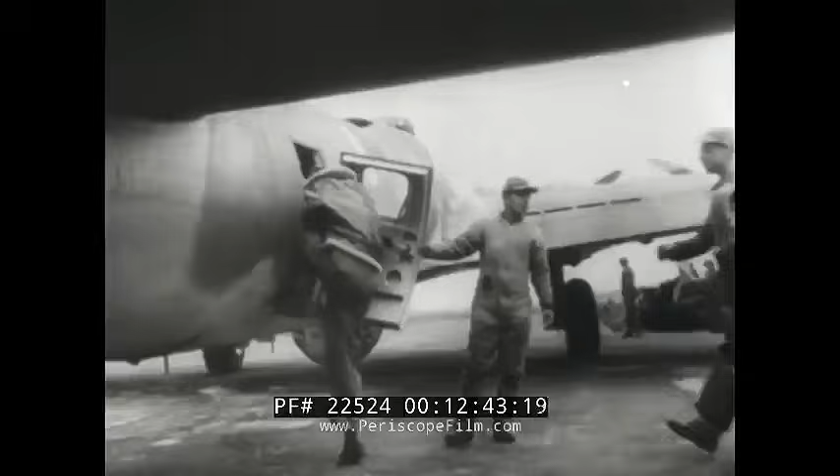Allied planners looked at that and saw a bottleneck, a single point through which the entire German war machine passed, and in 1943 they went for it, at a cost in bombers and crews that remains among the heaviest of the war. The results were disappointing relative to the price, for reasons this channel has explored elsewhere: stockpiles, dispersal, neutral suppliers, substitution, and the general truth that an industry is more resilient than a set of buildings.

But the strategic observation stands, and it is the mirror image of everything in this story. Germany's bearing industry was superb and concentrated. America's was, by the 1940s, superb and spread across many firms in many states, Fafnir in Connecticut being the largest independent among a whole population of competitors. Germany had a capital city of bearings. America had an industry with no capital at all.

That is not a claim of American cleverness. It is largely an accident of how the two industries grew, one from a single inventor's workshop outward, the other from a scatter of firms all trying to displace imports at once. But the strategic consequence was real, and the lesson generalizes well beyond bearings. The thing that makes you dominant in peacetime, the deep concentration of skill in one place, is the thing that makes you vulnerable in war.

Excellence and resilience are not the same property, and they can be in tension. Honesty requires a correction to the title, and the correction makes the story better rather than worse.

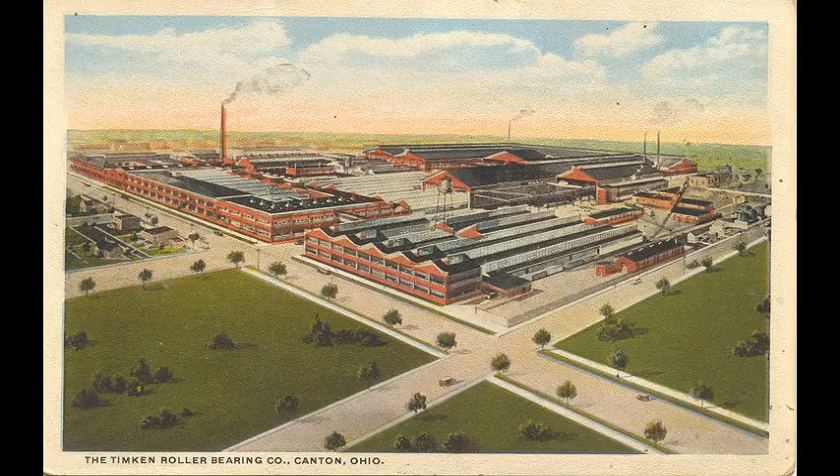Fafnir was not the only factory. It was not even the first. New Departure in Bristol, Connecticut, had been making ball bearings since the 1890s, having started, improbably, as a doorbell company, and had patented bearing designs of its own by 1908, before becoming part of General Motors. Hyatt Roller Bearing, Norma-Hoffmann, Marlin Rockwell, and the American operations of SKF all built the industry alongside Fafnir, and Timken had been making its tapered roller bearings since 1899.

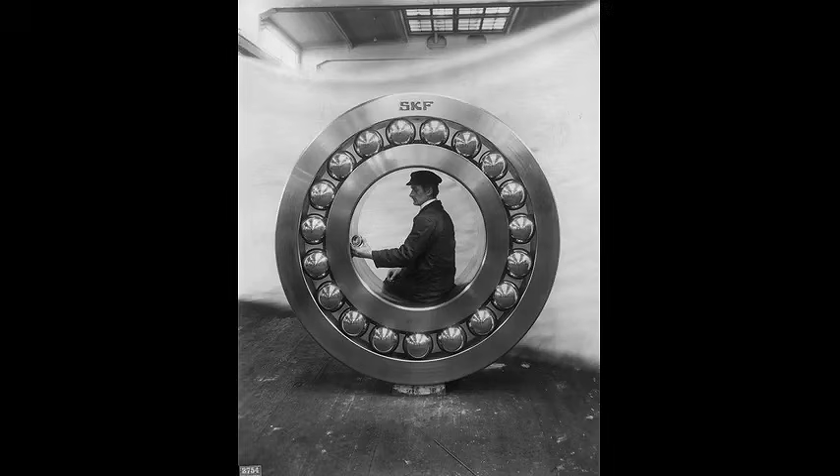The American bearing industry was a crowd, not a hero, nor was Germany the only source of imports. Bearings and components came from England as well, and the greatest single force in the world bearing industry was Swedish, not German. And Britain faced precisely the same dependency at precisely the same time, founding firms such as Ransome and Marles during the First World War for exactly the same reason. Before the war, most British bearings had been imported, chiefly from Germany.

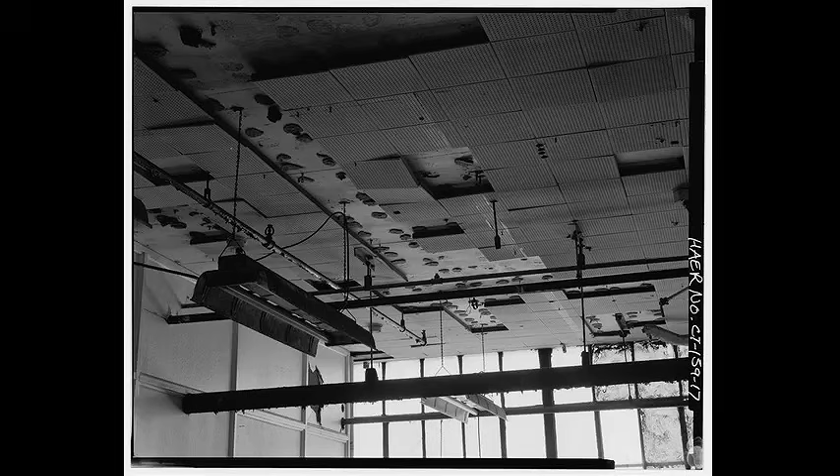So the accurate version is this. Around 1911, the best bearings in the world came from Germany, America could not match them, and a number of American firms set out to change that. Fafnir is the clearest and best documented example of a company founded explicitly on the proposition of making German quality bearings in America. It started from an almost comically weak position, and it ended as the largest independent ball bearing manufacturer in the country. That is a smaller claim than the title makes, and a more impressive one, because it is true.

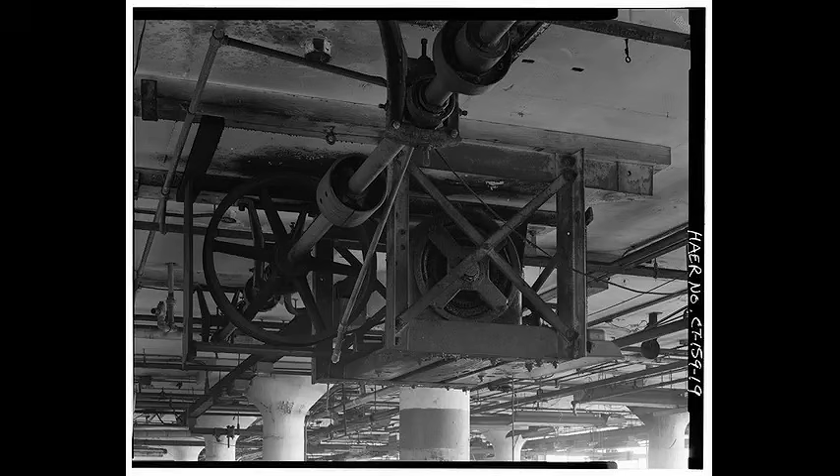The lesson of the ball bearing is about the difference between knowing and doing. Every engineer in America in 1911 knew what a ball bearing was, could draw one, could explain exactly why it worked. Not one of them could make one to German standard, and the gap between those two states is where industrial power actually lives. Design knowledge is published, portable, and cheap. Process knowledge is tacit, local, and expensive, accumulated only by making the thing badly for long enough to learn how to make it well, and it is the only kind that cannot be acquired by reading.

Which means that closing such a gap is never a matter of a breakthrough. It is a matter of a company being willing to spend years being worse than the competition on purpose. 7 men, 1 day, 150 bearings is what the beginning of that always looks like, and it looks like failure. And the only difference between a firm that becomes an industry and a firm that quits is whether anyone is prepared to fund the humiliating part.

In a war decided by what could be made, the smallest and simplest object in the machine was one of the hardest to make, and America started from behind. The perfect sphere cannot be cut because there is no place on it to aim. It can only be generated by rolling imperfect balls endlessly between grooved plates until every high spot has been worn away, and the only shape left is the one with no high spots at all.

Friedrich Fischer understood that in a Bavarian bicycle shop in 1883, and it made his town the capital of an industry. 28 years later, 7 men in a Connecticut hardware town began working it out for themselves, badly, expensively, 150 at a time. 32 years after that, the same company was making 100 a minute in a plant with 7,000 people, supplying an arsenal that armed half the world and had gone from copying German bearings to exporting American ones to 6 continents.

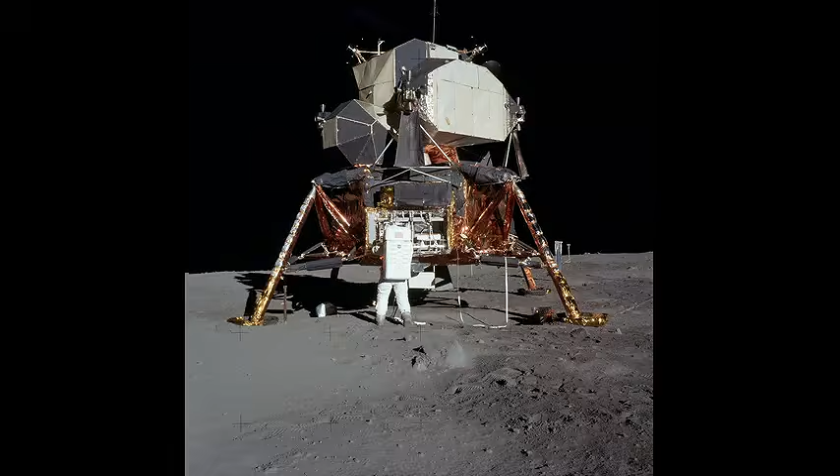That was enough. In a war decided by what could be made, they learned to make the hard, simple thing, and then they made it faster than anyone.